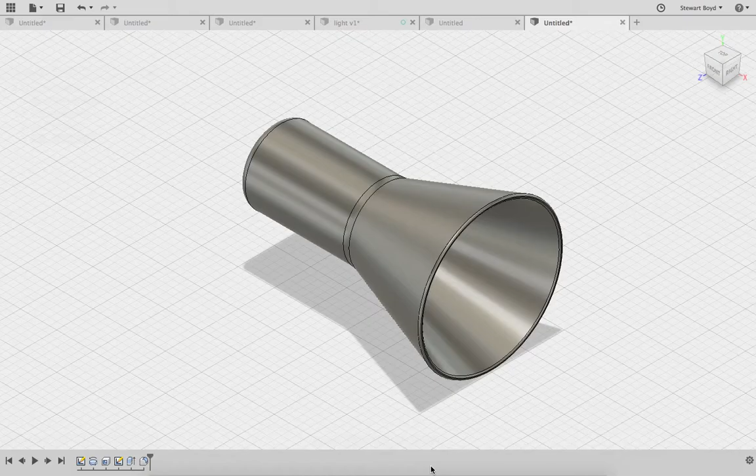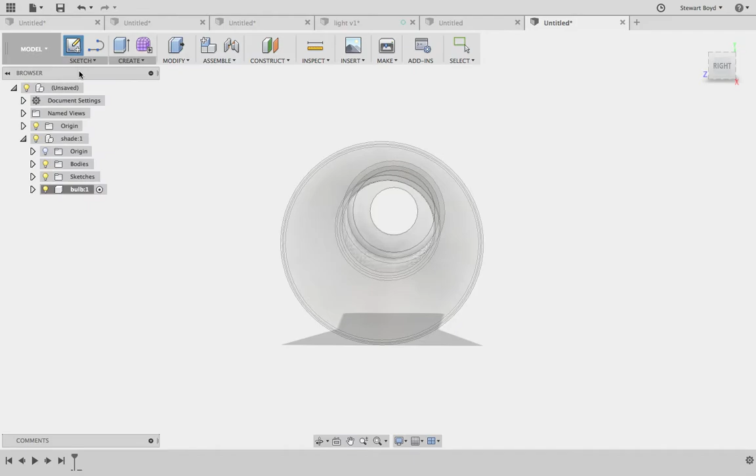So the next part will be to put a bulb inside, and we've hollowed out the back section. So the first thing to do will be to create a new component and then put in bulb. There it appears in the design tree, and then sketch, create sketch on that back face.

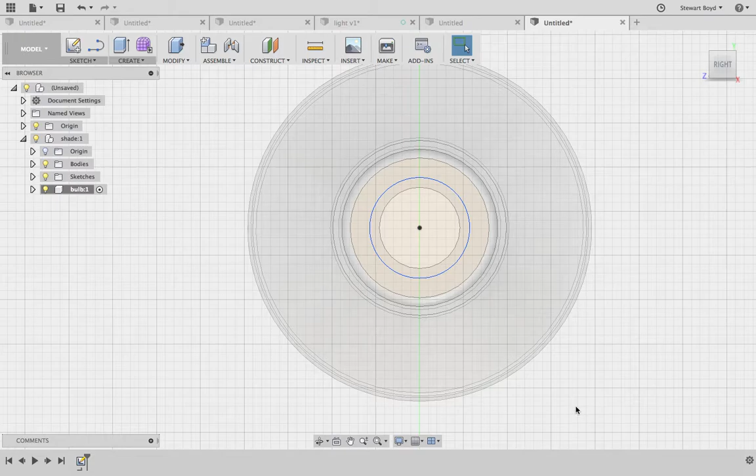And I need to create a center circle which is bigger than the hole that's been cut. I'll zoom in. Great, and then stop your sketch. So that sketch has been done on the back edge.

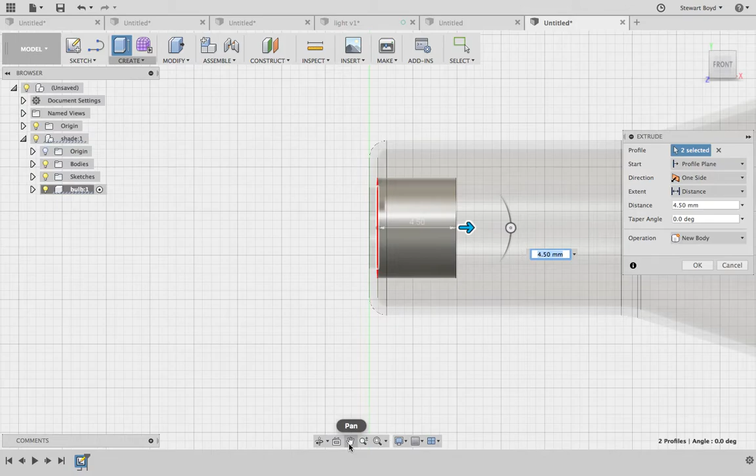And what I'll do now is I'll extrude that profile and that one, and I'll have a look from the right and then flip it round, and there you go. I can see how much I can extrude that. So judge yourself how much you want to extrude that, and then press OK.

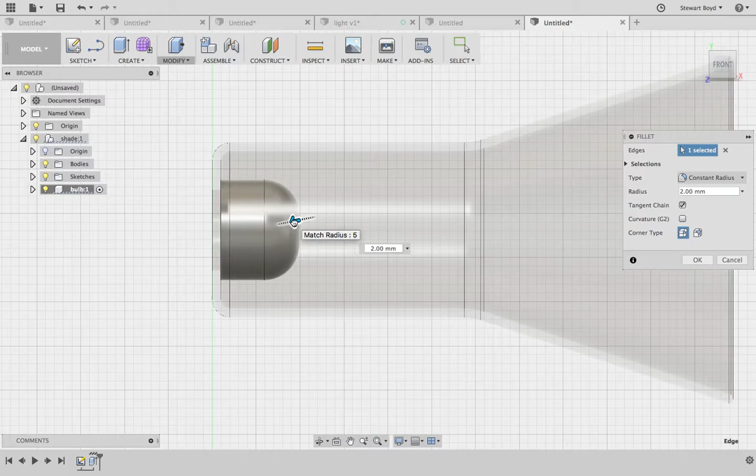Now while I'm there, I may as well round it off as if it's a bulb. So fillet that edge and then drag the arrow in. So it could be an LED, and then press OK. So that particular unit won't be stuck on the back.

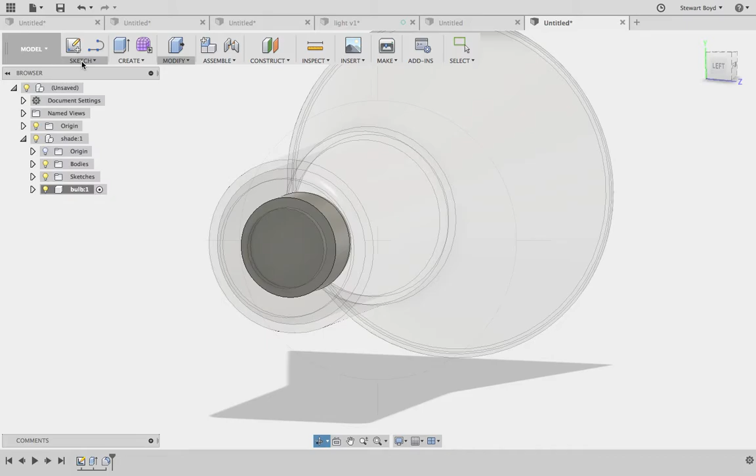It will probably have some power coming out, so it will need to be slightly changed. So this time I'm going to create sketch on this back face, and I'm going to create a circle.

Center, find the center point again where it goes from there, like a blue circle, click, and I'll make it as big as the first one. There you go, and then stop your sketch.

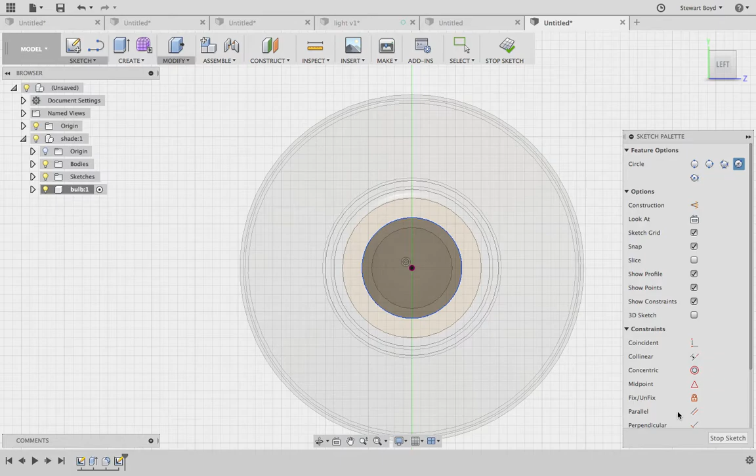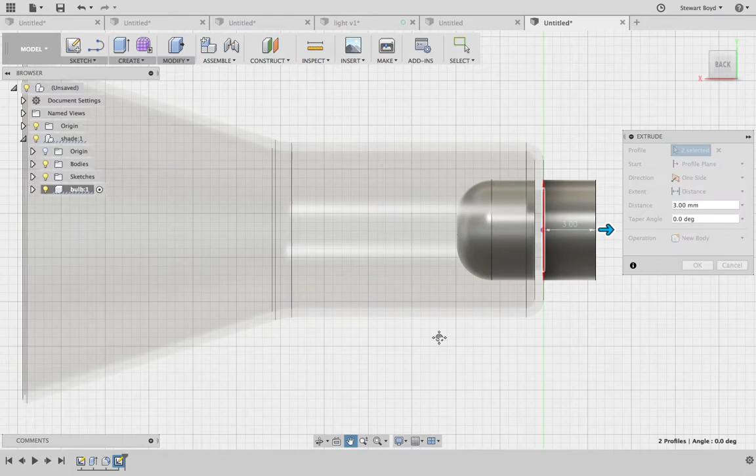Now go to create, extrude the big circle and the little circle, and then drag them out and have a look at the left, and then turn. And I've dragged it out. I'm going to drag it out a little bit more than the length from here to here, because I'll show you why a bit later on.

So there we go, that'll be okay. And then press.

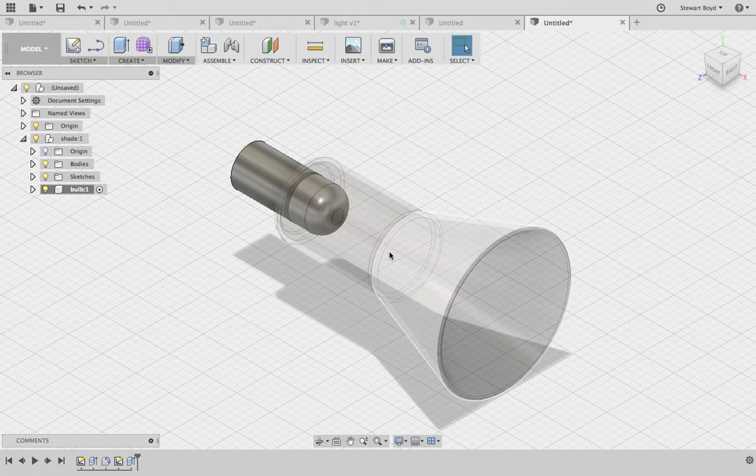Now then, I've got this unit. This will support a bracket for the back of the unit. So to give you some idea what this looks like, I'm going to go to render. And in the render mode, you can see that the bulb's inside, but it's not been switched on or anything.

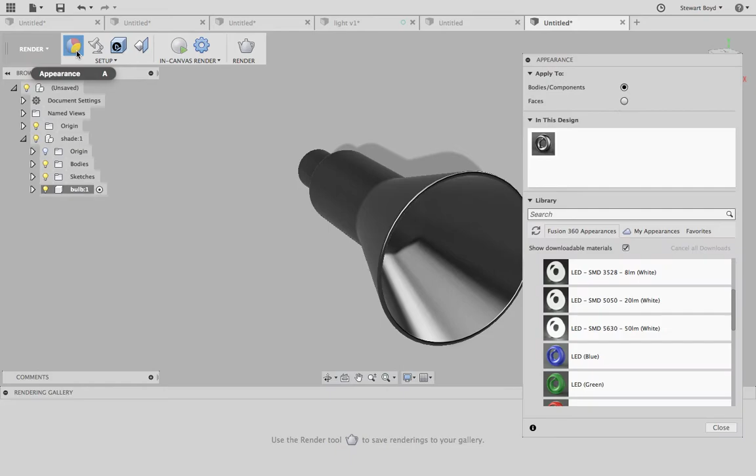So now I need to designate some colours. So I'll click on appearance, and if I'd started from scratch, it'll look like this. So I'm going to get plastic opaque, and then I'll get a nice red, and I'll drop it onto the surface.

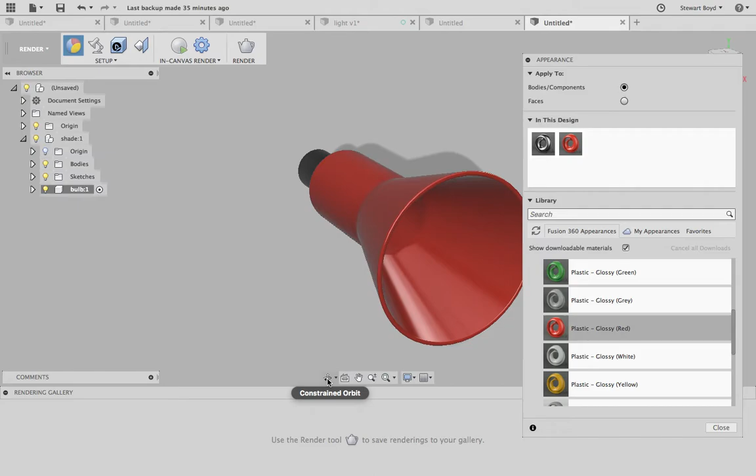Now, the bulb itself, I need to make shine and make light up. So what I'm going to do is I'm going to have a look at the shade. So this particular component, where's my bulb? So my bulb, my main shade.

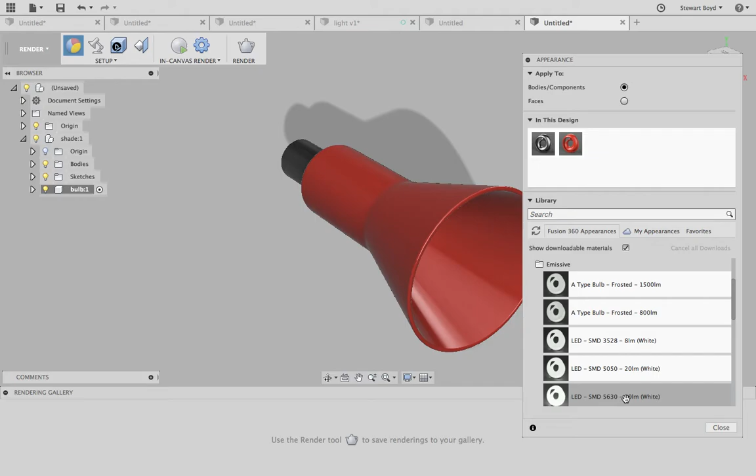Okay, so what I'm going to do is I'm going to click, and I'm going to go to Other, and I'm going to find under Emissive my LED. Now the LED can be applied to a face.

So if I zoom in and then just pan, I can turn and I can see the inside of that bulb. And if I just click and drag it onto that face and then onto that face, and then...

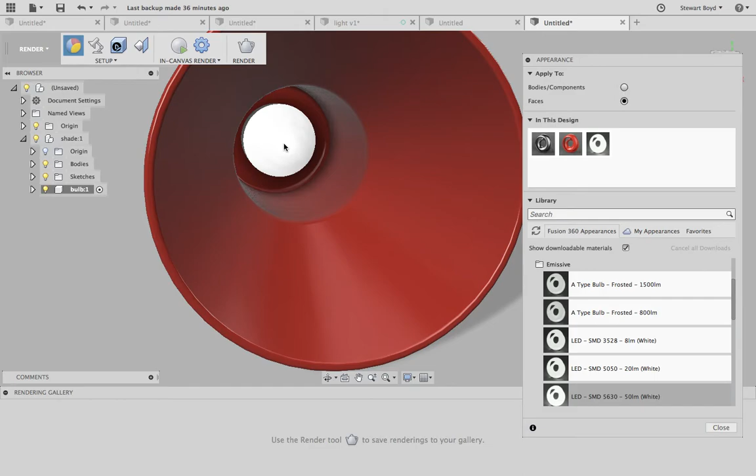Twist up, and I'm going to give this a white colour. So if I go back to my plastic and then go for opaque and then go for white, I'm going to give this a glossy.

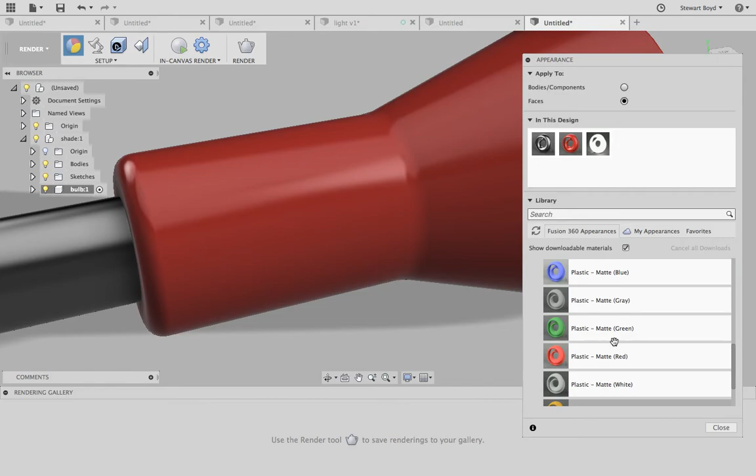See if I can find a glossy white. There we go, and drag it onto there. And that's still on face. Okay.

Now I can close that off, press home. Sometimes it does, sometimes it doesn't. There you go, and I can see that the bulb is inside the shade.

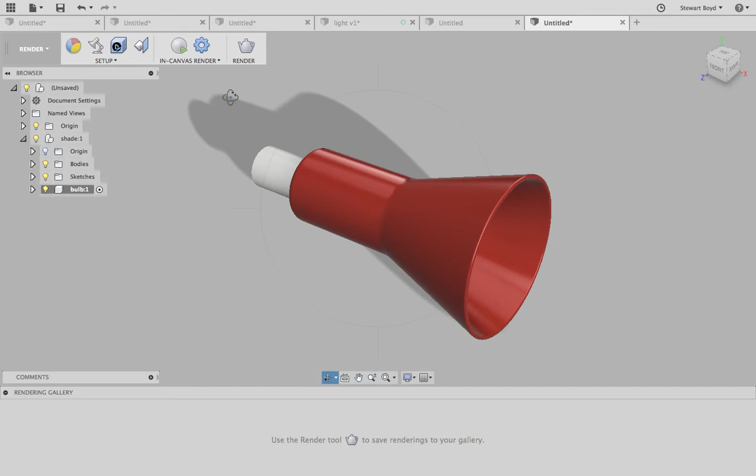And what I'd like to do now is I would like to go to my setup, go to scene settings, change it to environment, and put my reflections on, and go to the library, and I'm going to change it to, in fact I'll leave it on sharp highlights.

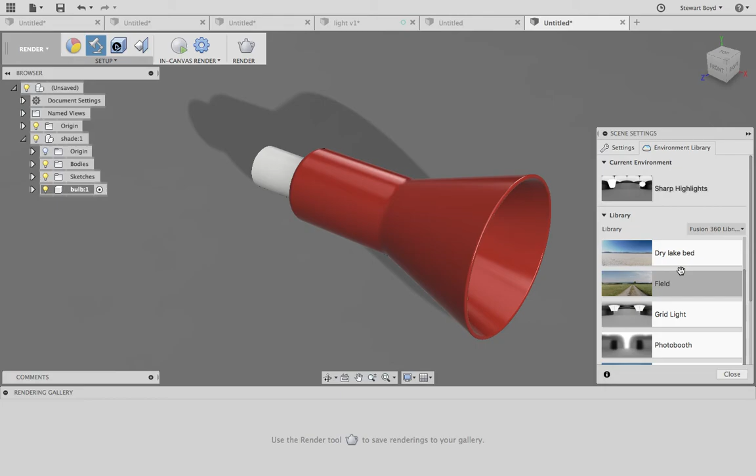And close. And before, actually I'll go back there, go to my scene settings, and I'm going to turn down the brightness to 500, so it's quite dark. In fact I could do less, 250. Yep, and then press close.

Go to in-canvas render settings. It's normally defaulted for advanced. You can click on fast, and you might, before you start, you might want to rotate it and see what views you get.

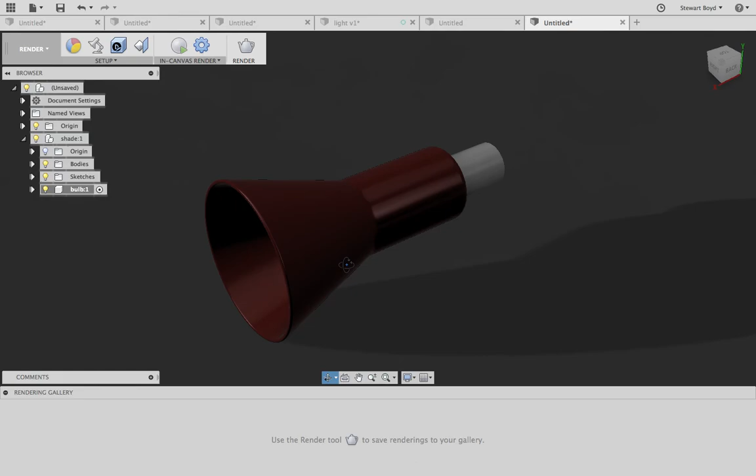And then you might want to just press play, and automatically you can see the bulb comes on, and you have to watch the elapsed time, and it gets sharper and sharper and sharper, and you can see the light that throws out. There you go.